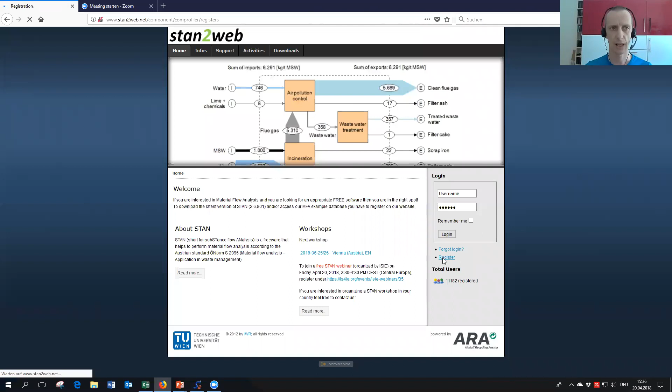So what you see here is the website of STAN, and what you have to do to get STAN is you have to register here on this button. You have to enter your login credentials and a few of your data that we would like to know. And when you click the register button, you will receive an email that you have to reply to, to activate your account. Then you can log in here in this window.

As soon as you have logged in, you have access to our download section. Here you see a STAN button where you get all the information that you need to install STAN. So you have to download this file, extract it, afterwards install it on your computer, and if everything worked fine, you will find an icon on your computer. Here, a STAN icon that you have to double click to open STAN.

So that's what I'm going to do now. What you see here now is the user interface of STAN. A brief overview of what you will hear and see in the next 40 minutes: first of all, I will show you how to create a graphical model, how to enter data, and how to perform calculations. This will be the first part, just to give you a basic idea how to work with STAN.

The main focus of my presentation will be on how to handle data uncertainties, why it is important to handle uncertainties, why it is important to consider them, what you can do with these uncertainties with statistical tools like data reconciliation and uncertainty propagation. And I will also show you how you can use them to detect errors in your model.

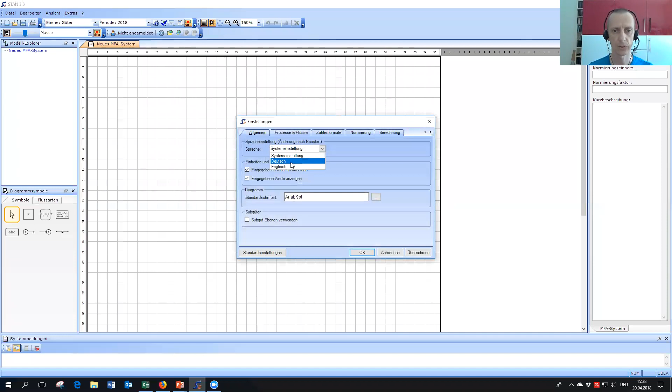So here we are again. Now we have the English version of STAN. And you see again the drawing area, the shapes window. What you can do here is you can select an object, for example the process icon, and click somewhere on the drawing area to insert a process with a predefined size.

I will rename this process by clicking on it. And then you see on the right side, the process properties. I'll zoom in again - the process properties, where you can change the properties of this process.

If you select here the tab process, you can see that you can change the short symbol of the process, you can change the name of the process, and you can make some other selections that I will cover a little later on. So first of all, let's rename this process to production, with the short symbol PR.

So then I will insert another process here, for example. I will call this consumption, or CO.

What I want to do next is connect these two processes with a flow, with an internal flow. The icon for an internal flow is this one. And what you need to know to connect two processes is that on the perimeter of this process, there are so-called anchor points that you can use to connect flows to.

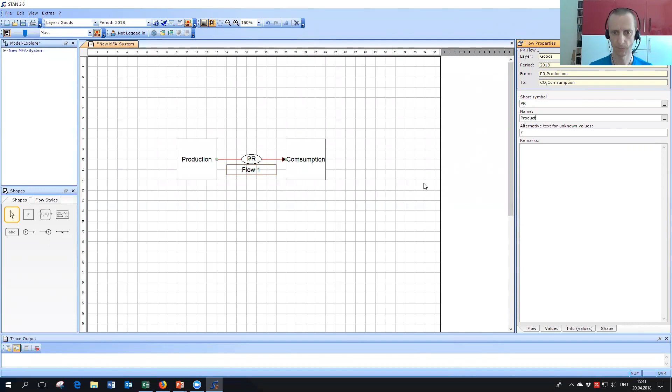And I would like to have now an import flow. An import flow is a flow that comes from some processes outside of your system boundary and leads to one of the processes that you want to consider during your material flow analysis.

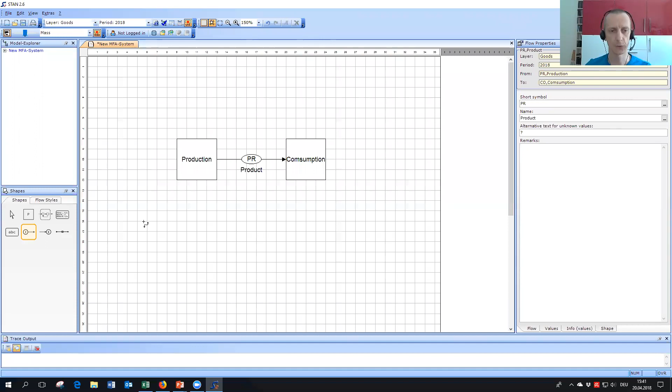So I can select this import flow icon. Here the connection process is a little bit different - it's easier. You only have to click the anchor point where you want to connect the import flow to, and the import flow is drawn automatically.

So I will rename this import flow to raw materials, or short name RM.

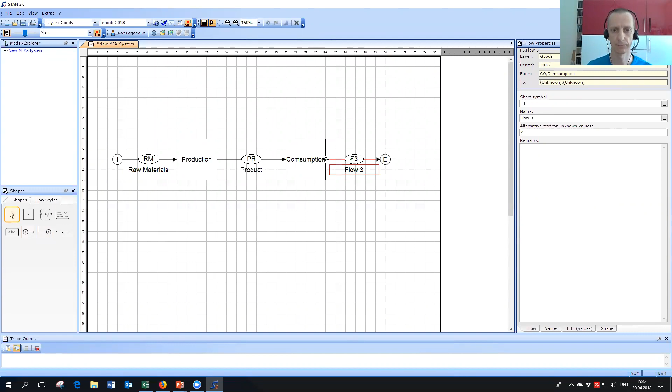And then I will insert an export flow that is leaving our system, that leaves the consumption on the right side. And I rename this flow to waste, with short symbol WA.

Additionally, I want to have a recycling flow so that some parts of the materials going into consumption that are not disposed of as waste are going back to the production process. So I insert another internal flow that is going from consumption to production.

Okay, that doesn't look very pretty now, and you might not be satisfied with the layout of flow 4. That can be changed pretty easily by selecting this flow. Now you see the starting point, the end point, and in the middle you have a small handle that you can use to create additional turning points of this flow course.

So when I take it and shift it to this position, you see we have a turning point, and on these straight lines of this flow you see again these green handles that you can use to add additional turning points. So now everything looks pretty much good.

I haven't entered the name of this flow. It should be recycling material, or short RM. Okay, that's our model.

I'm satisfied with the model. Of course, there are some assumptions, some simplifications. A model is always a simplification of reality. And you see, we haven't any waste flow during production. That's an assumption.

So we assume that all the raw materials can be used to create the product. The next step is that we are going to enter data. That's pretty easy, you only have to select the object where you want to enter data for.

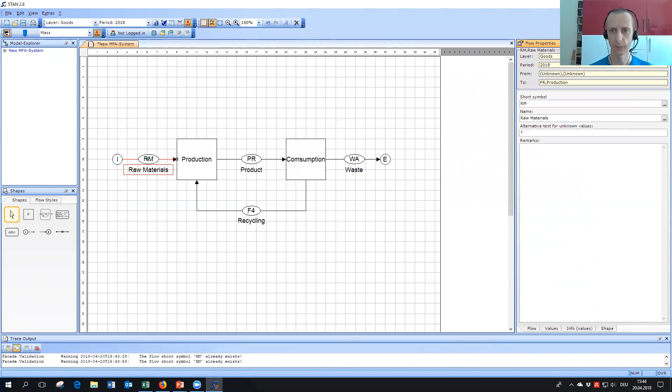Let's say the raw materials flow. You go to the flow properties window on the right side, this time not the tab flow, but the tab values. Here you have the option to enter different types of data. For example, you can enter mass flows if you know them, or you can enter volume flows together with the density to compute these mass flows.

In our case, I assume we have here 100, and I'm satisfied with the unit written behind, tons per year. As soon as you click enter, you see that this number is displayed inside your graph in the form of a Sankey diagram, where the width of the arrow is proportional to the mass that is transported. If this arrow covers the label of the flow, you can move it easily to a different position, or use the slider here to adjust the width of these Sankey arrows.

Whenever you have entered data in your model, you can try to do some calculations. To start a calculation, you use this calculator symbol in the toolbar. If you click it, you will see if it is possible for Stan to compute some of the unknown flows or quantities.

So I press the button now, and what you see is that suddenly there is a value appearing for this waste flow on the right side. And this is not magic. This has to do with a requirement of material flow analysis.

When you are performing material flow analysis, you have to obey the law of mass conservation. Material cannot appear or disappear within your system, it has to be constant. You can think of these two processes as a large process where one flow is going in and one flow is going out. Because of the law of mass conservation, the mass flow going in must be exactly the same size as the flow going out, because we have no stock in our model.

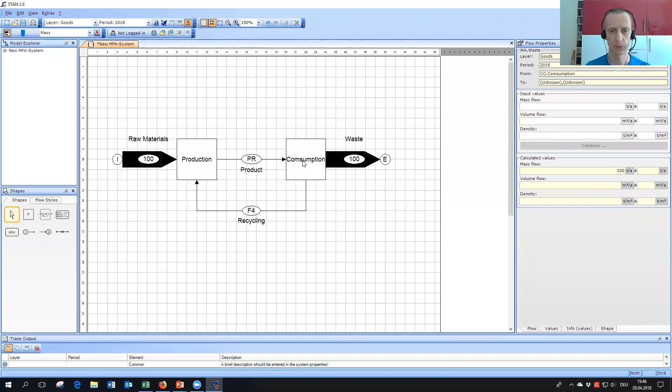A transfer coefficient tells you how much of what is going into a process is transferred to a special output flow. This is a feature of a process. So when I want to insert a transfer coefficient, let's say a recycling rate in process consumption, I double click on this process. Then you will see a window with a transfer coefficient matrix where you can enter this information.

First of all, you see that we have here a row labeled sum of inputs, and one row labeled PR, that's the product flow. We have only one input flow, so it doesn't matter if I enter the data with respect to the sum of inputs or the individual input flow product.

So what I'm going to do is enter the transfer coefficient. Well, I've just seen that I haven't entered a short symbol for the recycling material flow. But anyway, I enter here 0.6. That means 60% of the product going to consumption will be recycled afterwards.

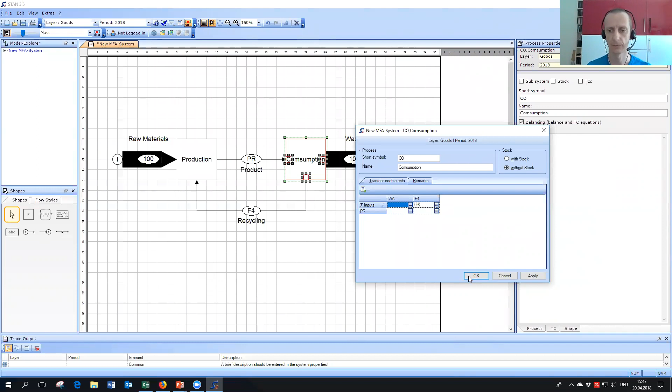Okay, so I will go back here to recycling. It's done. And if I now repeat the calculation, you will see that with this information, everything could be calculated. This is pretty clear because of the information that 60% of what is going into recycling, 40% must go into the waste flow. Because I know the value of the waste flow, I can compute the product flow. And when I know the product flow and the waste flow, I can compute the recycling flow. I think this is no magic at all.

But what is a little problematic here is that we have precise values. So when you send this diagram to, let's say, a decision maker, you're suggesting that each of these flows has exactly a precise value. And that's not the case, because in my opinion, there is no such thing like a precise value.

Each of these values has an uncertainty, even if it's negligibly small. So you have to consider these uncertainties in order to perform really good material flow analyses. Let's have a look at what we can do with data uncertainties.

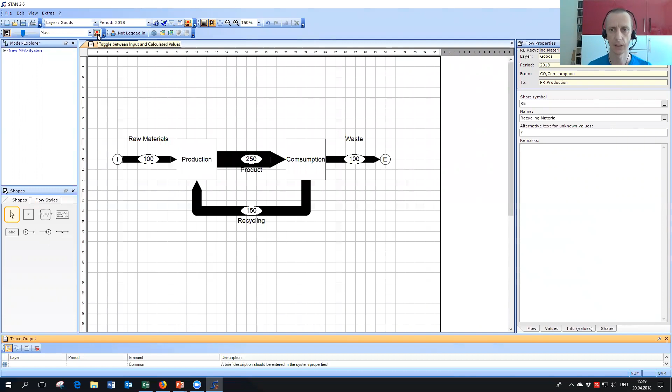First, I would like to switch back to the original input data by pressing this data button. You see that 100 units are going in. Maybe it's a good idea to insert a legend to show what these numbers mean, so you see here now this is 100 tons per year. What also can be done now is assign an uncertainty to this input flow.

So we select the flow, go to the flow properties window, select the values tab. Here we have already entered the mean value, the measurement, let's say it that way. Right from this measurement number, you have the chance to enter an uncertainty, and I would like to enter here plus minus 10 tons per year. As soon as I click the drawing area again, you see that this uncertainty is taken over into our graph.

What's important for you to know is that when using uncertainties in STAN, we always assume that these uncertainties, representing a random number, are normally distributed. You know this bell-shaped curve, where in the middle you have the mean value, that's our measurement, and the uncertainty tells you how much the possible values deviate from this mean value. The larger the uncertainty, the more they deviate from the mean value.

This is an assumption that we need in order to use statistical tools like data reconciliation. It's not necessary for error propagation, but it is for data reconciliation. Okay, now let's see what happens if we press the calculation button again.

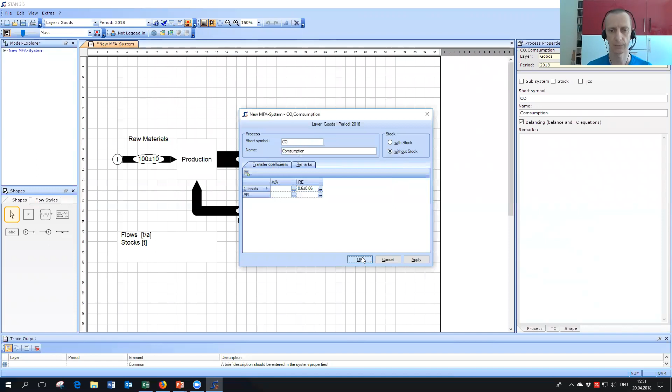But now let's go a step further and also assume that this transfer coefficient, this recycling rate we used, has also an uncertainty. So we double click on the consumption process and get again this transfer coefficient matrix. What we do here now is click this button behind this number, then you have the chance to enter an uncertainty, so let's say also 10%. Click OK, and then repeat the calculation.

I think it's also clear that this additionally inputted uncertainty in the recycling rate has raised the uncertainty of the computed flows here in the middle. So I think it is essential information for a decision maker that these values you are computing have an uncertainty. In this case, if you construct an uncertainty interval, say 2 times a confidence interval, 2 times the standard error, you have a value of 150 plus minus approximately 80. That's a lot. When you have to design a plant, this is really valuable information that it is not a precise value, but there is the possibility, the likelihood, to get values far away from 150.

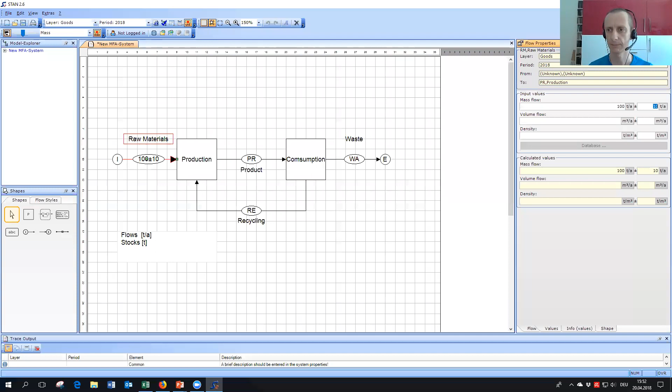Okay, let's go back to our original input data, and I will show you what can happen if you are not using data uncertainties. I will delete this uncertainty here again. Let's say the input flow, this raw materials flow, was measured with 95, and this waste flow was measured with 105, plus minus 10. So if you're now using the calculation feature of STAN and press the calculator button... oh sorry, I wanted to delete the uncertainty here.

So if you repeat the calculation now, you will get an error warning. Whenever you get one, have a look in the trace output here at the bottom. Here you get information about what's wrong. You will see that these red circles with the exclamation mark tell you that there is a contradiction in constant input data.

If you want to know where these flows are situated, just click on this entry and you see the respective flow is highlighted. The same with the second entry. So these two flows are involved in this contradiction warning. I hope it is clear from what I said before that there is a problem with mass conservation. When you think of this large process where one flow is going in and one flow is going out, they have to have the same number, but they have not.

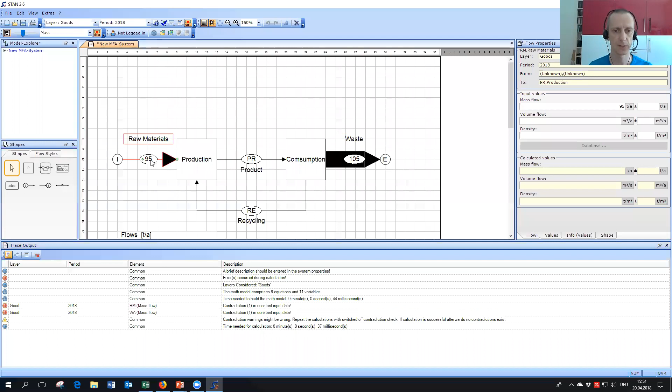So it's difficult to decide which of these two numbers shall be used, 95 or 105. That's something where data reconciliation can help you. When you have such situations and it's possible to assign uncertainties to these numbers, let's say 10 again, then something will happen. You are now not sure about the true value of raw materials and waste, so they can have other mean values. When you press the calculation button, you get this result, and the contradiction is resolved.

You see now the mean value of raw materials and waste is 100, and additionally the initially given uncertainty has been reduced. Those are the two main advantages of data reconciliation: first, contradictions are resolved, and second, the uncertainty of the original data is reduced. As soon as you don't have any contradiction anymore, it's easy to compute the mean value and uncertainty of product flow and recycling flow using uncertainty propagation.

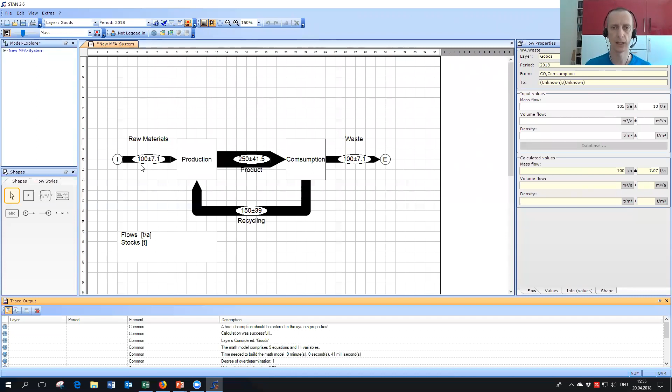But why is the result exactly 100? How did we get this result? I hope it'll be clear with the following example. Let's say this is 95 plus minus 10, and this is 105 plus minus 10. Both values have the same absolute uncertainty, meaning they can be shifted to the same extent. The problem is they have to meet somewhere to resolve the contradiction. Where will they meet? Exactly in the middle, between 95 and 105. That's why we get the solution 100.

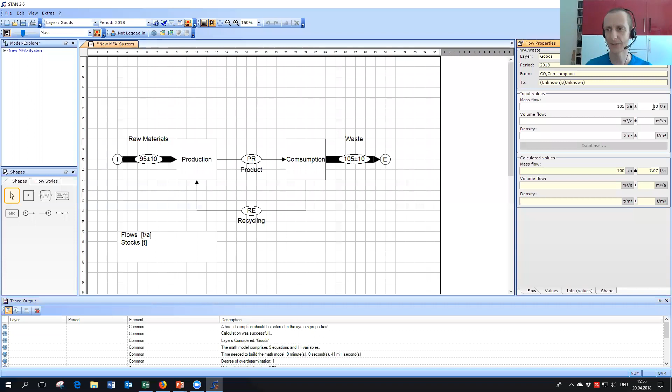But now let's go one step back, and assume that the uncertainty of the raw materials flow is smaller. So now we repeat this calculation procedure, and you'll see we get a different result. It's not 100 anymore, but this time it's 97. This is because we have chosen different uncertainties.

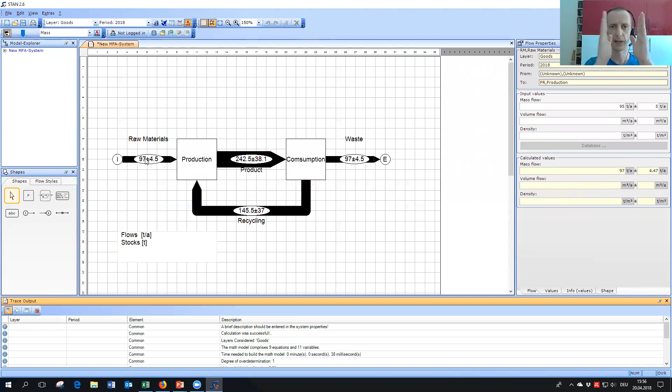So why do we get 97 and not 100? Again, in this model, we have 95 here and 105 here. 95 has a smaller uncertainty than 105. That means when you shift 95 a little bit, 105 shifts a larger bit, and they have to meet somewhere. They will meet in the vicinity of 95, and that's the reason why we get 97.

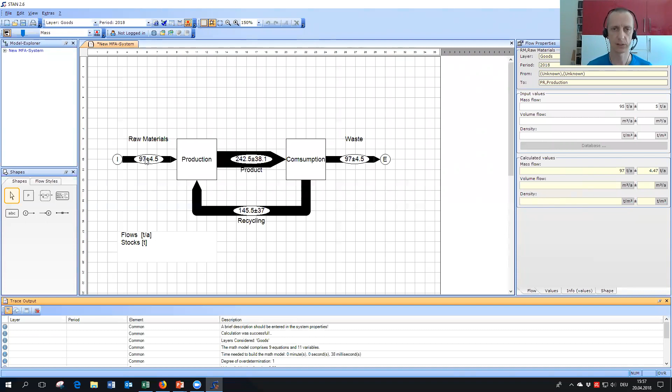I don't want to go into detail about the algorithm behind this, you can check it in data reconciliation literature, but that's the way it works. What's essential for you is that the choice of uncertainty influences the result of your material flow analysis. In my opinion, you should try to determine the uncertainty of your flows as well as possible. No uncertainty is not a good solution. So if you cannot measure or compute your uncertainties, it's better to guess than to assume there is no uncertainty.

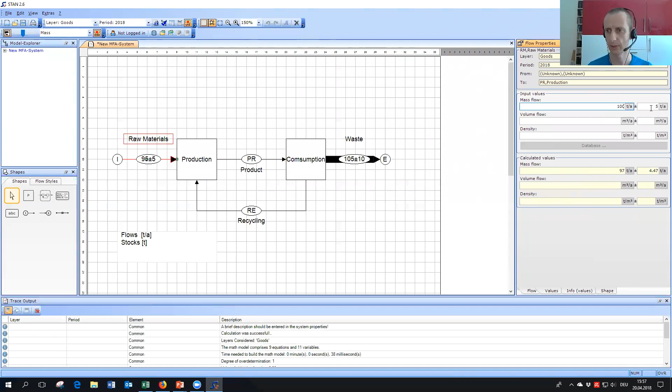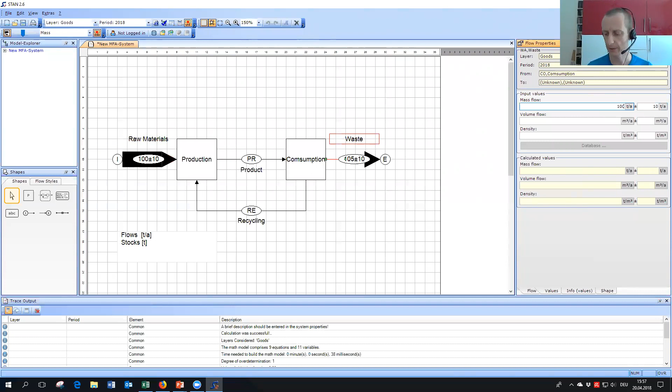Okay, another example here. Let's go back to 100. This time I'd like to introduce a gross error. Let's say someone wanted to type in 100, but typed a 0 too much. So the input values look like this. The question is now, what will happen if you perform data reconciliation? Let's try it.

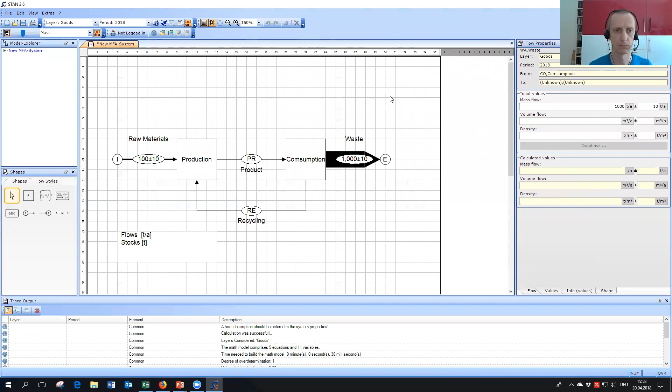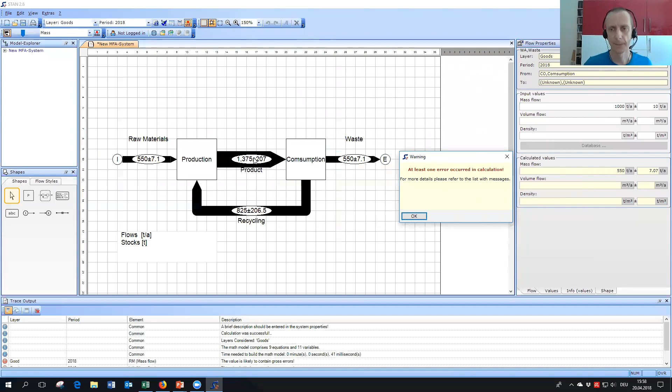There is a result, but we get an error warning. Why is there a result? I think from a mathematical sense it makes sense. Both input values had an absolute uncertainty of 10, so the computed value must lie precisely between 100 and 1000, and that's 550. The uncertainty is reduced and we can compute product flow and recycling flow.

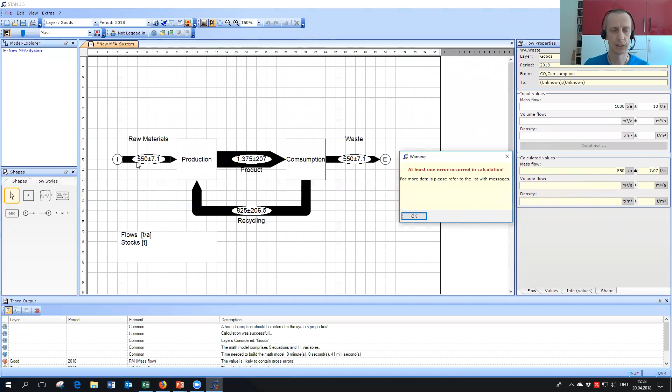But the reconciled values are far away from the initial given data, so we have a problem here. These kinds of problems STAN recognizes. We have a statistical test running in the background that checks if such a situation appears, and if yes, you get a warning. Inside the trace output, you see it's written that the value is likely to contain gross errors. If you want to know which flow is meant, click on it, and you see either here is an error or here is an error.

What you have to do now is check your original data and find out where the error might be situated. If you check your data and see, oh yes, here is a 0 too much, you can take it away, repeat the calculation, and the problem is gone. So that's error propagation and data reconciliation, a really valuable tool to deal with uncertainties and to help you resolve contradicting data.

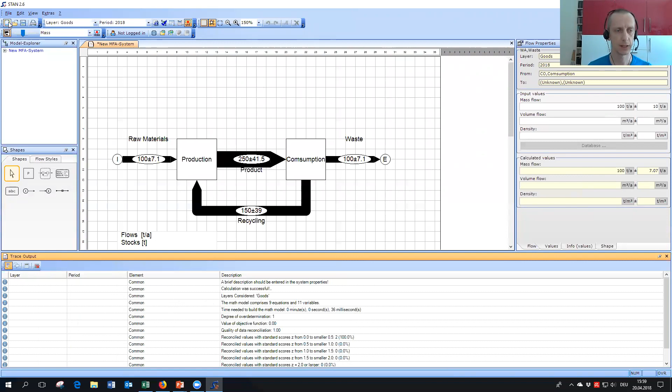Okay, the next step. I want to create a new model to show you this multiple layer feature and multiple period feature of Stan. So let's assume we have here one process with 2 input flows and 2 output flows.

Now I would like to enter data, not only for the layer of goods, that's the materials that are transported, but also for a substance contained inside these materials. I want to move from an analysis on the layer of goods to an analysis on the layer of a substance. To do this, I have to define a substance layer.

When you click this drop-down menu, you see at the moment we only have the layer of goods. Click Edit, go to Layers and Periods, and click in the field below the short symbol. You'll get a drop-down menu where you can select from a list of elements of the periodic table. Let's choose S, but let's say it's not sulfur, it is substance, any substance.

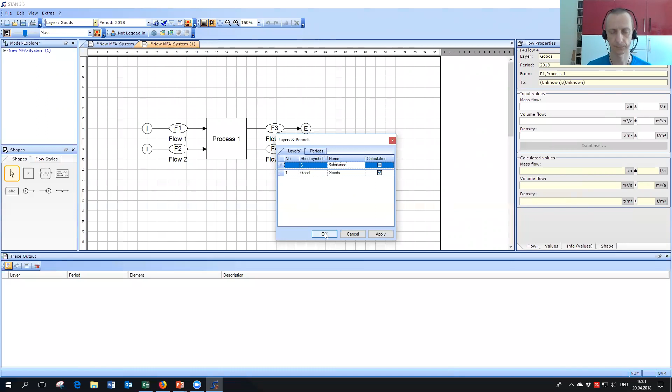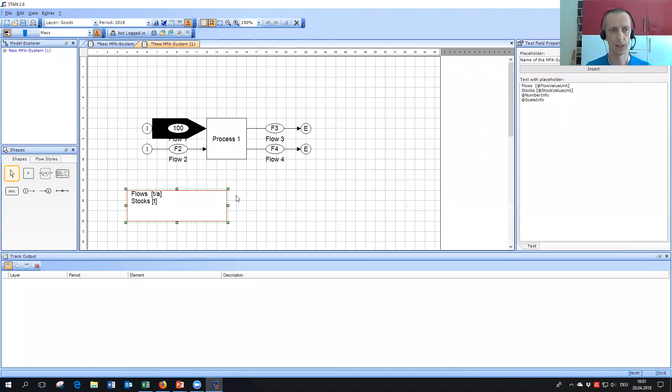So the step from an analysis on the layer of goods to an analysis on the layer of substance is that you have to enter data for both layers. The first is on the layer of goods. I can enter 100 tons per year, for example. Good idea again is to insert the legend. And now I switch to the layer of substance.

Click the same flow, and you see the flow properties have changed a little bit. So I switch back to goods so you can see it. At the layer of goods, we have the option to enter mass flows, volume flows, and density.

On the layer of substance, you have the possibility to enter a mass flow, a mass fraction, or a mass concentration. Normally, you do not have information about the mass flow of a substance, say cadmium contained in your material, in tons per year. But what you have is information about the mass fraction. When you send a sample to your laboratory and ask them to analyze it, you'll get back a mass fraction, so many milligrams per kilogram of this substance.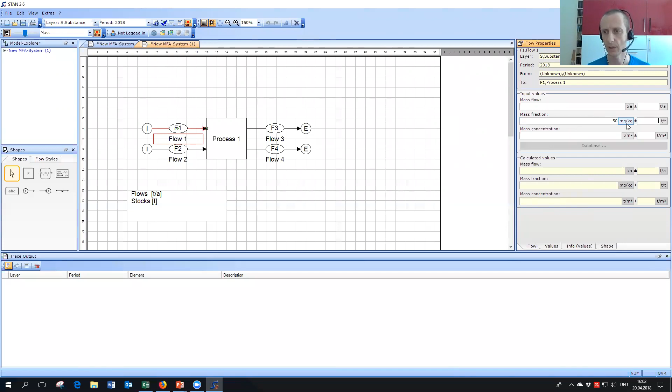That's what can be entered here. Let's enter 50, but this time it's not tons per ton, it's milligrams per kilogram. When you press enter, you'll see this value is accepted, and the unit button on the right has changed to the unit you chose. That's enough, we don't need more.

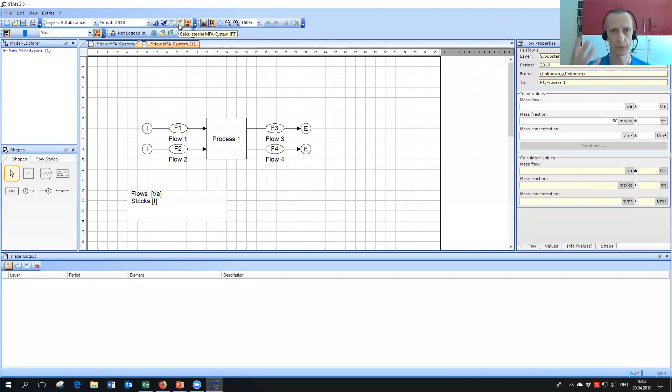So what we can do now is press the calculation button, and you'll see that the information on the layer of goods, its mass flow of goods, is multiplied with the mass fraction to get the mass flow on the layer of the substance. Let's do it. You see on the layer of goods we still have the 100, and on the layer of the substance there's 0.01 tons per year of this substance transported along flow 1.

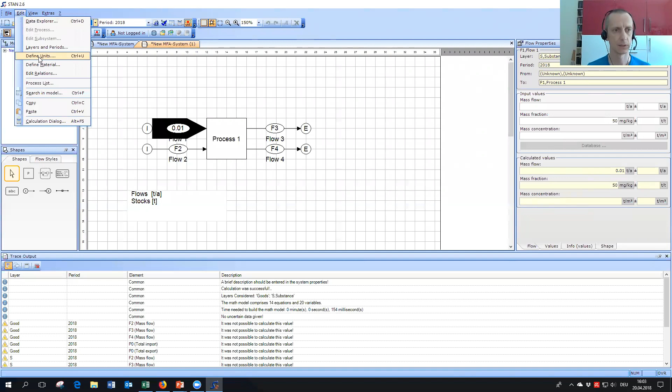Normally, when you get such low numbers, it's a sign the display unit hasn't been chosen properly, so it's a good idea to change it. This can be done by clicking Edit, Define Units, or the shortcut Control U. Here you can change the display unit from tons per year to, let's say, kilograms per year, and click OK. Then you see we have 5 kilograms of our substance transported along flow 1.

That's more or less substance flow analysis. You can do this for all of these flows, and then you would get a result.

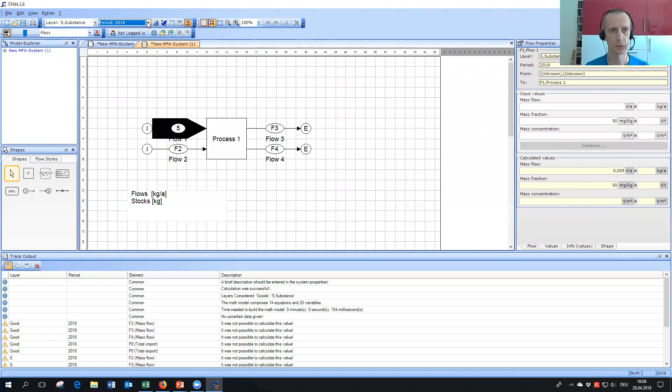Now let's assume we don't only want to show the period 2018 shown here, but we'd like to create a time series from the year 2001 to 2005. So what you have to do to create a time series is state that there are more periods than this one.

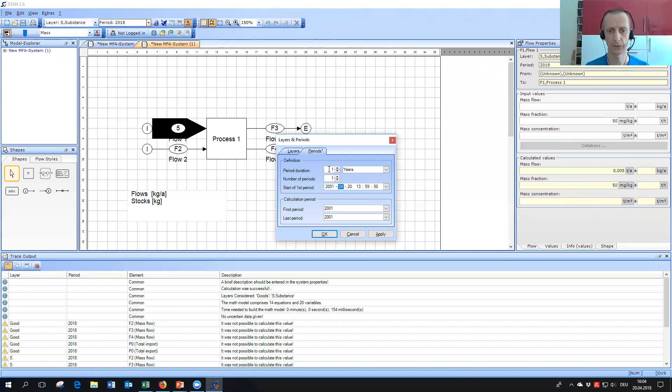You can do it by clicking Edit, again Layers and Periods. Click the Periods button, and you see the period duration, the number of periods, and the start of the first period. I will change this to 2001. Because we're looking at years, we don't need to change anything behind 2001. The period duration is still 1 year, but I will raise the number to 5 periods. Then I click OK.

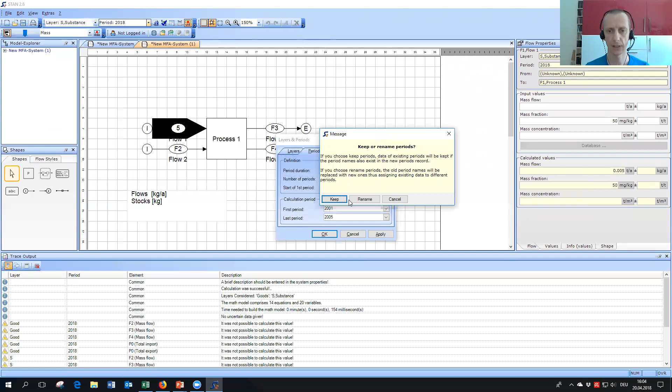I'll be asked something not important for our problem, so I'll take this away. Now we have here not only the layer of goods and substance, but also the periods 2001 to 2005. I think you can imagine it's quite laborious to enter data manually for all these flows. For this reason, we've developed something called Data Explorer, which you can reach by clicking Edit, Data Explorer.

You see it here for this reason. In the Data Explorer, you see a list of all the data sets of your models. Here you see the data sets with respect to flows that are available.

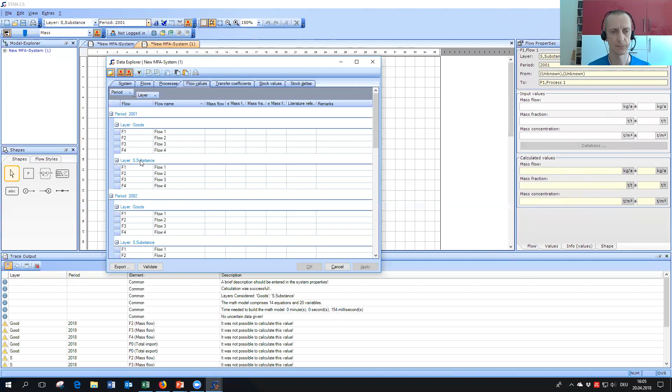The initial setting is that the data sets are grouped to certain attributes. First, period, so you see period 2001, 2002, and so on. The second attribute is layer - layer goods, layer substance. Now let's assume that we have somewhere... I have to close it, sorry.

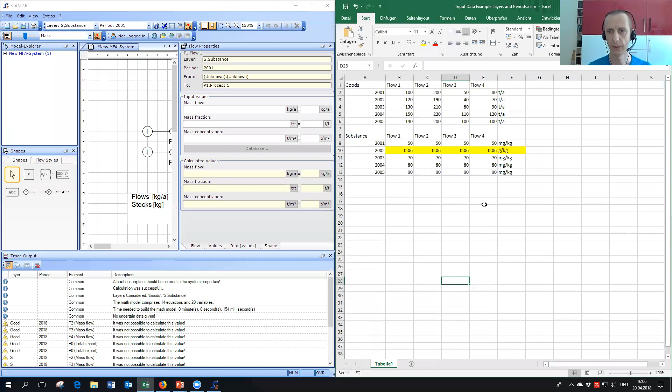Let's assume that we have an Excel sheet where we have information given about these flows. So what we want to do now is import this information, given here in the form of a table, into our STAN model.

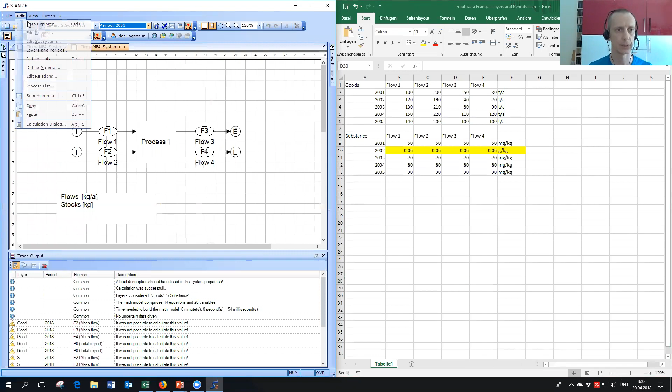So we open the Data Explorer, and the tricky thing is that to enter data you have to mark blocks of data in Excel, copy it, and paste it to STAN. If the table structure in Excel and in STAN is not the same, you will get a mess, so you have to make sure the table structures match.

This can either be done by adjusting the table in Excel, but it's easier to do by adjusting your table here in STAN. How is this achieved? You can shift this attribute back to this line of column descriptions.

Now we have all our data grouped with respect to periods. Instead of layer, I take flow names and move it to the second position. Now that's wrong - period is wrong, sorry. Layer on the first position and flow names on the second position.

Now we have achieved exactly what we wanted. So we have layers - goods and substance. We have the flow names, F1, F2, and so on. And we have here the names of our periods. And that's exactly what we have here.

The next thing we have to do is copy one of these data blocks. I press Ctrl+C to copy it. Then I move my mouse pointer, select the first cell where to enter this block, and press Ctrl+V. You see this data has been entered.

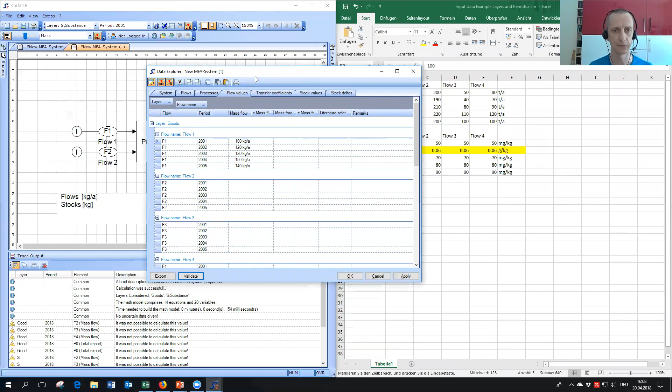That's not what we want. What we want is to enter or insert this data together with the unit. This can be done pretty easily here in Excel by combining the numbers with the units. How can we do this? You select the cell, press equals, and select the number and the unit.

Here I make some small adjustments, not important. Then I can have a block of data that is a combination of my value and the unit. Now I can copy this block and paste it here - you see tons per year. Then I click Validate, and if these units are known inside STAN, it will give no error message. Perfect, that's exactly what we wanted to do.

We can now do the same for flow 2, for flow 3, and for flow 4.

Now we repeat this procedure for our substance information. You see that here no mass flow is given, but a mass fraction, so I will again combine the number with the unit. Now I take this block, go to the substance area here in the Data Explorer, and paste it here.

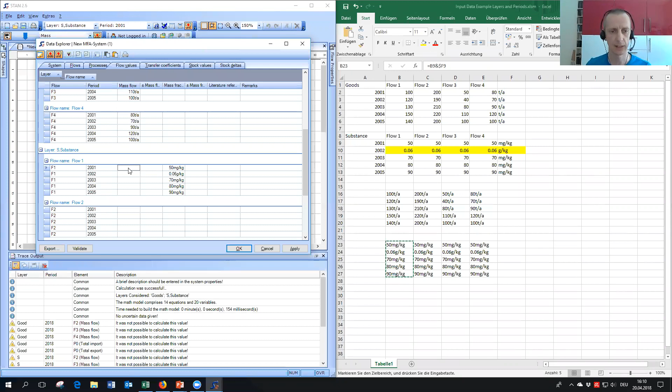So here, for simplification reasons, we have the same concentrations for all flows, so I will copy it here.

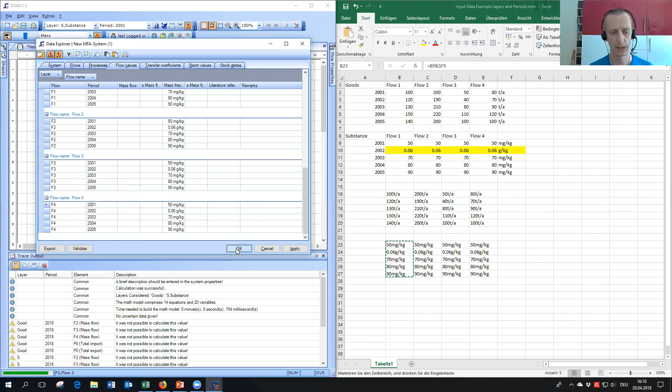We can validate it. Perfect, everything has been recognized, and then press OK. Now the data are imported into your model, and you can check it quite easily.

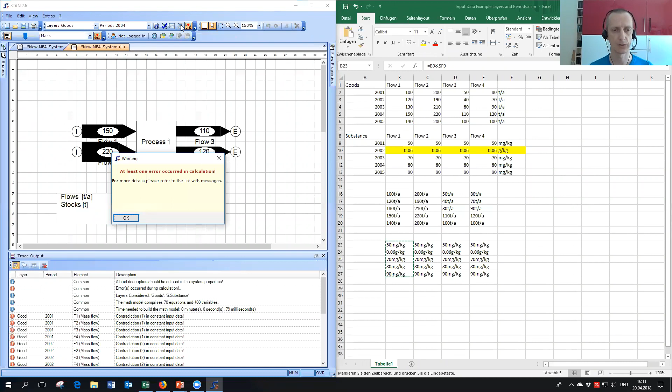For each of the periods, you see now the according values have been imported. So when we now press the calculation button, you will get an error message. The question is why? It's easy to show you. The problem is that the law of mass conservation is violated, so there is much more going in than going out. The reason is I forgot to insert here a stock.

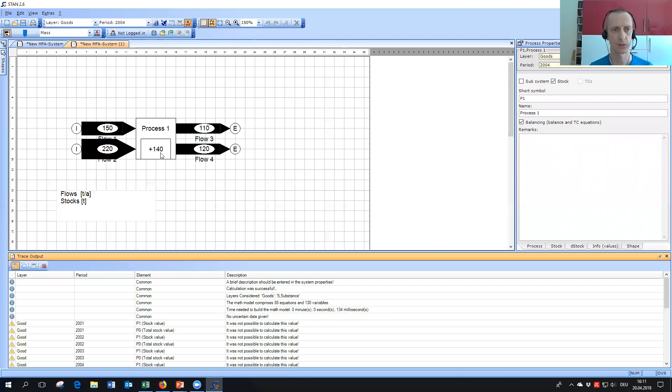So I define that it is allowed to store material in process 1. I click the process, select the process window, and here on tab process you have the opportunity to select stock. You see this is an additional rectangle displayed here. And if you perform the calculation now, you see that we get the change in stock displayed here for each of these periods, the same on the layer of substance.

So that's pretty much the result of our material flow analysis. The only thing we want to know now is maybe what is the amount of material inside of stock—that's only the change in stock. For this reason, I recommend stating the amount of material at the beginning of the first period.

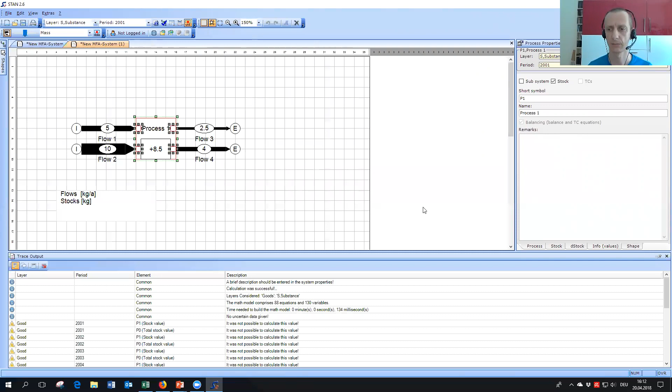So I select it, then I select the process, and here on tab stock, I can state that there is nothing inside of the stock at the layer of substance, and on the layer of goods, exactly the same. Then I repeat the calculation, and now you see that at the beginning of the last period, we have 680 tons of material inside of our stock, and the change in stock is 140. So at the end of this period, we have 820 units inside of our stock.

Okay, I'm nearly at the end of my presentation. Of course, there's much more to be said about STAN—we only covered the very basic features of STAN. And I think this is a good reason to add a little commercial here.

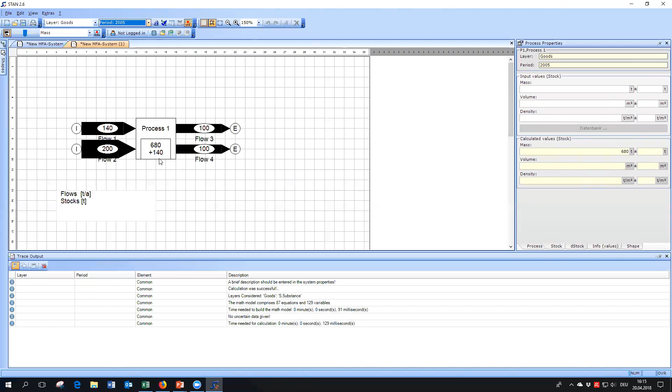That is all right. Next question: is it possible to separate one flow into different flows? For example, we can create subsystems, but is it possible to create subflows for detailed analysis? Yes, I will show you how to do this. The easiest way, if you do not want to show that a flow is split or consists of different other flows, is this: you have my shapes again, you enter a process—let's say we have one flow going in and maybe the same flow going out.

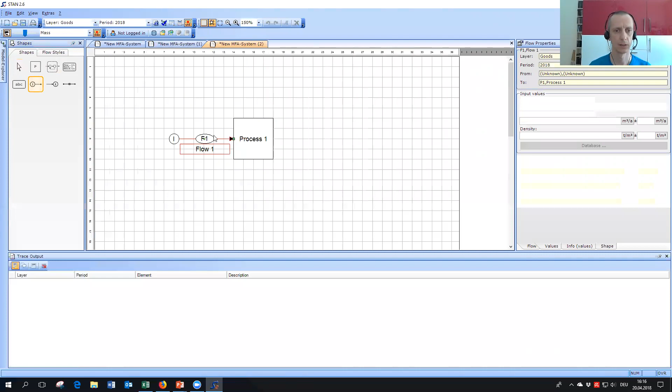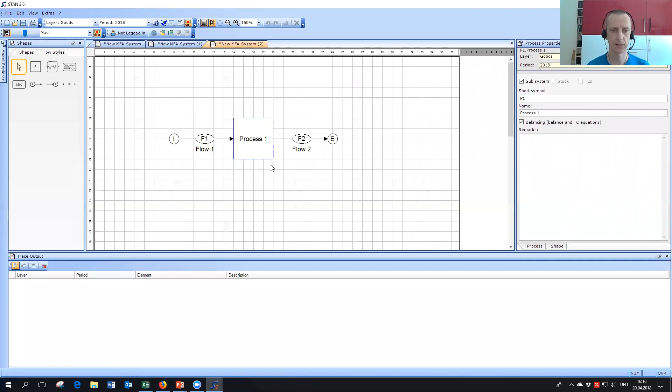That's, let's say, a virtual process. And inside of it, you could create something called a subsystem. That's another way of determining what is going on inside of a process. What I would do here is select in the process property window and set a tick at subsystem. Then you see this process gets a blue border, signifying that this is a subsystem. When you double click on it, you see that all of the input and output flows of this process...

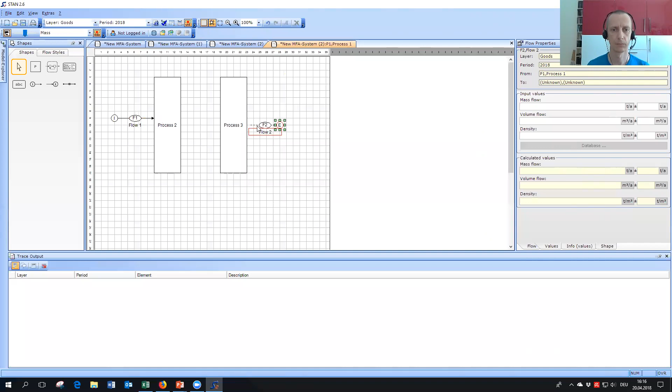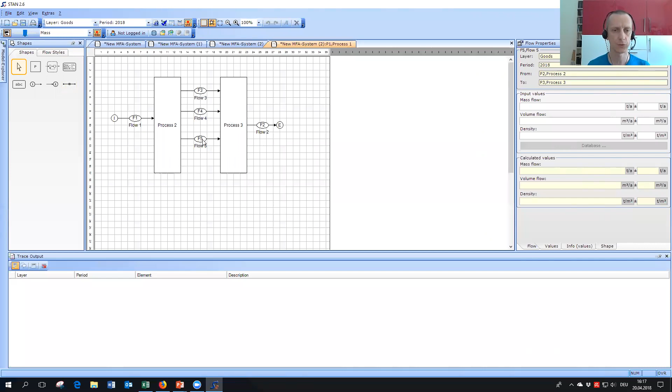...are here defined as import and export flows. What you could do here is enter a virtually splitting process, for example, and a virtually adding process. You connect these flows, and then, of course, some internal flows here, and so on. So when you know the materials your original flow consists of, you can model it with as many flows as you need. Then you can enter the data for these individual flows, and we'll compute the sum of it for flow 1 and flow 2. I hope this answers your question.

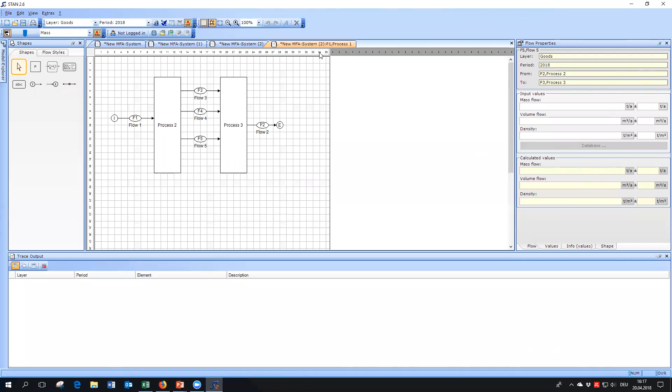Another question is, how can you calculate the transfer coefficient, and is it possible to introduce the unit mass per volume for substance values? Can you repeat the question, the first part? Sure, how can you calculate the transfer coefficient? Yeah, okay, got it.

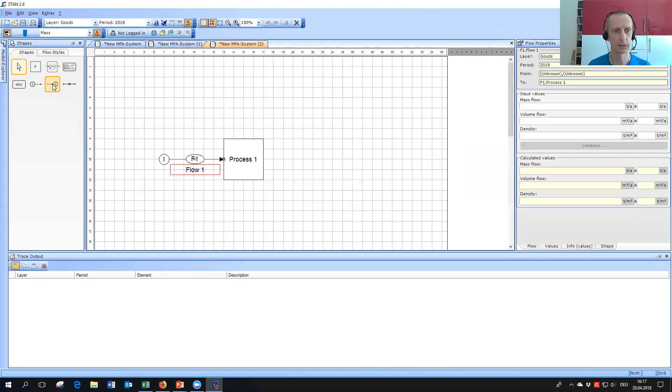That's pretty easy. One way that we did is we stated the transfer coefficient, and exactly the same way it is possible to compute the transfer coefficient. So in this little example, there's something going in and something going out. In this case, we know all the materials going in, let's say 100, 60 is going out, and of course flow 3 can be computed from mass conservation. Now we want to know the transfer coefficient. In this case it's easy, of course: it's 0.6 for flow 2 and 0.4 for flow 3.

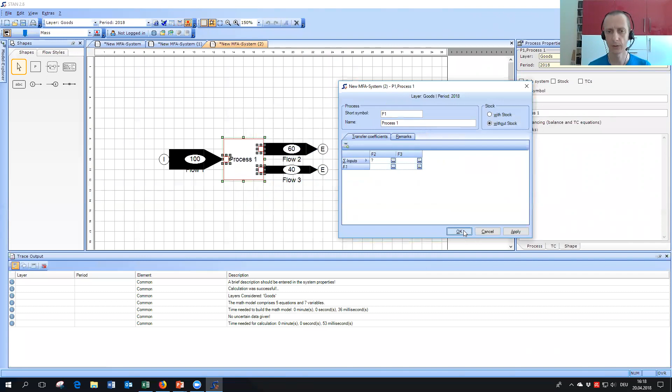But you can do it by double-clicking the process icon. This time we are not stating any transfer coefficient, but entering a question mark here, or you can do the same by pressing the button behind this edit field and setting a tick at calculate. When you now perform a calculation and click this process, you will see the results for your transfer coefficient, which can also be seen in the Data Explorer. We have here the flow values, and when you switch to transfer coefficient, you have the according transfer coefficients.

The next question: will you present the energy flow analysis in the workshop in Vienna? And what is the main difference between material versus energy flows? Is it possible to include energy and material flows in one MFA system?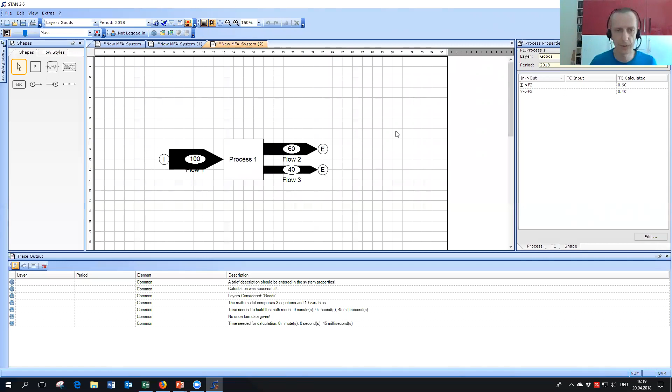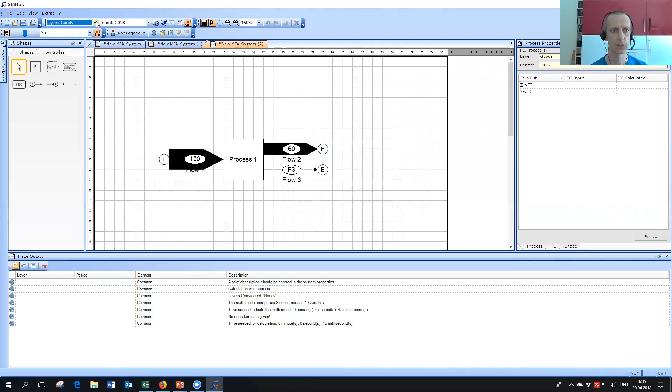Yes, it is possible, because the energy flows have the same criteria, more or less, like mass. There is a law of energy conservation, so no energy can disappear, but normally it's more or less constant. The approach we chose is we handle an energy layer more or less in the same way as a substance layer. The only thing that is different, I will show you here. So I could add an energy layer, switch to the energy layer, and you see now for the flows the units have changed. Here you have megajoule per year and specific energy in megajoules per ton, and megajoules per cubic meter if you have a volume on the layer of goods. You can handle it more or less the same way as I've shown you for the substance layers.

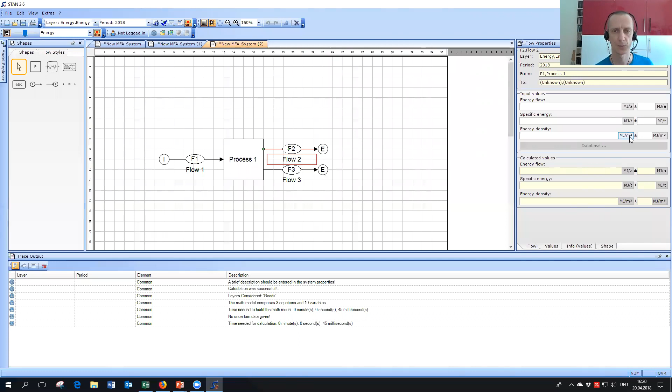And the second part of the question? One moment please, let's see here. The first part is, will you present the energy flow analysis? No, the examples in our workshop don't cover energy flows, but I will explain how to do it. We have an example in our workshop exercises that covers the problem of money flows, where we use the energy layer as a substitute layer for money flows. In this way I explain why we use the energy layer, so you might get an impression of what it is used for.

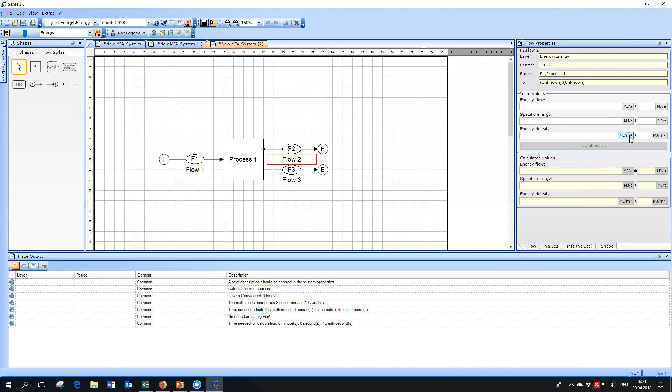The next question is, is it possible to plot the time series from the examples presented, or to export data to Excel in order to plot a graph there? Yes, this is possible. One way to do it immediately here in STAN is when you have a time series and you right-click a flow, you can display a time series for these flows immediately.

So you can see the initial values and the reconciled values if there are any reconciliations. Unfortunately, you cannot plot these graphs here. You would have to make screenshots. And if you want to make more advanced graphs of your time series, you cannot do it in STAN because we thought there are more or better suited software products on the market for this purpose. So we recommend exporting the data to Microsoft Excel, for example, and making the time series in Excel. Wonderful. And what is the maximum number of flows for STAN?

Well, that's a good question. Initially, this software tool was thought to be used by our students. It should have been a really small tool, and we didn't think there would be so many people interested in a material flow analysis tool. And because of that, and because STAN is already pretty old, more than nearly 12 years, we have the problem that when we have larger systems, let's say 100 processes and a few hundred flows, the user interface gets pretty slow. But it is still working.

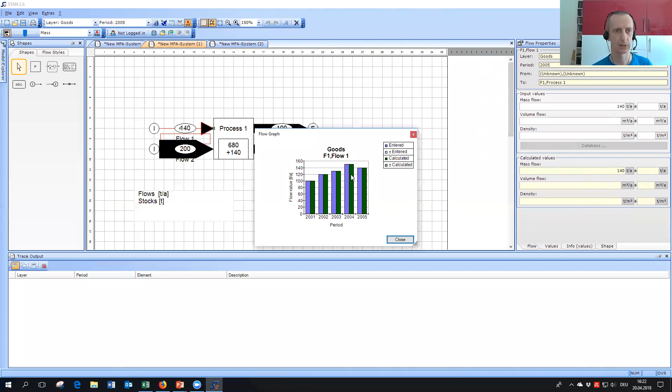If you have enough time to compute and to draw, you can also do large models with it. When the calculation procedure gets slower and slower using my calculation algorithm, we have an additional algorithm implemented here in STAN, called IMPL 2013. It's a commercial product that you can buy from Mr. Jeff Kelly. Jeff Kelly is situated in Toronto, and he is selling this product. So with this calculation algorithm, even large models can be computed pretty fast.

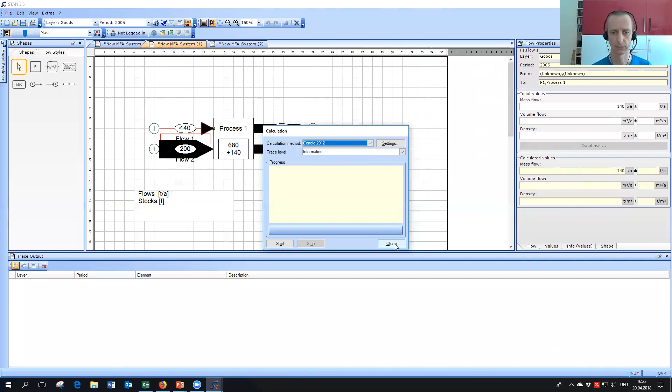Great. And can you split a flow of the same type of material going into 2 or more processes, like a Sankey diagram? If I can split a flow, yes, of course. I'm not sure if I understood this question correctly, but you can, of course, split a flow like I've shown you before. You have some processes. There is a flow going in, and of course, you can connect the output to other processes. And you can define with transfer coefficients what is going on, or how the splitting ratio is. And then when you know the amount or mass of flow 1 and the transfer coefficient, you can compute what is going to the different other processes.

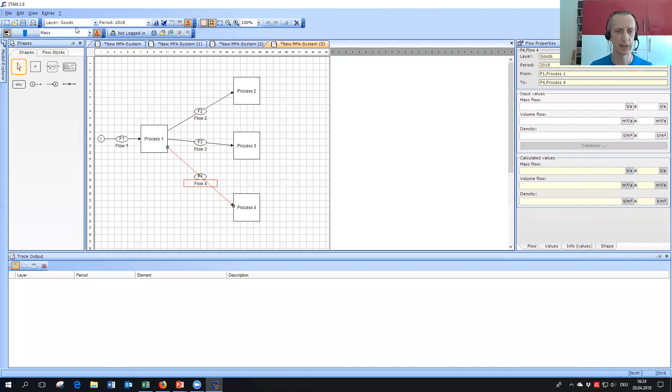All right, and can that one arrow be split further along the line? So I believe the question is, can you split a flow of the same type of material? So can flow 4, for instance, be split again? Only with what I've shown you before. You cannot say that flow 4 consists of submaterial A, B, and C - you cannot say this. You could model this, of course, with layers. You can create one layer for subgood A, for subgood B, and for subgood C, and define the fraction of these subgoods inside of your main good. Let's say it in this way.

Wonderful. And lastly, one last question related to dynamic modeling. The person asks, is it possible to do dynamic modeling with STAN? It is not possible to do dynamic modeling, or let's say the dynamic modeling capability of STAN is limited.

Because the only thing we can do is add additional relations between similar quantities. For example, here you have edit relation, and what you see here, you can edit this relation and tell STAN that, let's say, flow 1 equals 2 times flow 2. So this is an additional equation used within STAN. But when you are doing dynamic modeling, you need more than this. In dynamic modeling, you need the possibility to say that an export flow of a stock, for example, is a certain fraction of input flows, of more than one input flow from different periods before. And this is something that can be modeled with STAN, but it is pretty laborious and error prone.

So I would not recommend doing it here. I would recommend doing it in Excel, for example, and only inputting the results into STAN for displaying reasons. But maybe the best solution would be to use a completely different software tool. And that's, again, a commercial, because next week Stefan Pauliuk is talking about dynamic MFA with Python, and there he is exactly covering this topic that you are interested in.